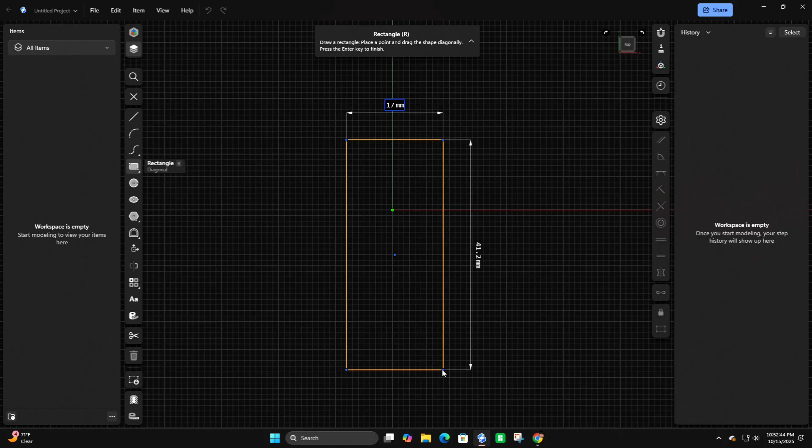All right, so here we go. Let's work through a little design.

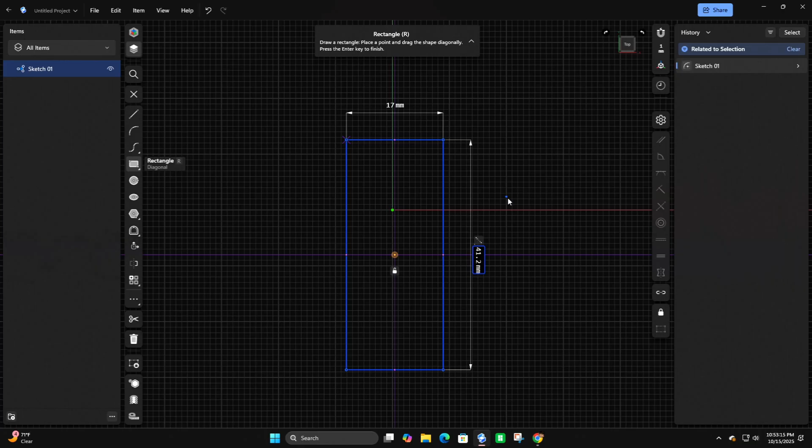We're going to come up here to plus. Now I like to use this top version here, so the cube up in the upper right-hand corner. Let me get rid of this. Up here in the upper right-hand corner you'll see the cube that moves things around. You can hold right click on the mouse and do the same thing. But if I left click right up here where it says top, see front, top, and hit top, that's going to give me a bird's eye view, top looking down. Now I just clicked on the scroll wheel and I was able to grab and move the screen.

Now let's start with a quick bookmark, and we're going to use some simple shapes. Come over here to sketch, and I'm going to left click on sketch to get that open up. And we're going to start with a rectangle.

I'm looking down at my caliper, my ruler, and I work in millimeters, it's just really easier. So I'm working in millimeters and I want the overall length of my bookmark. Let's make it 120, which is just about a little more than 4.5 inches, almost 4 3/4 of an inch. But we're just going to do that at 120.

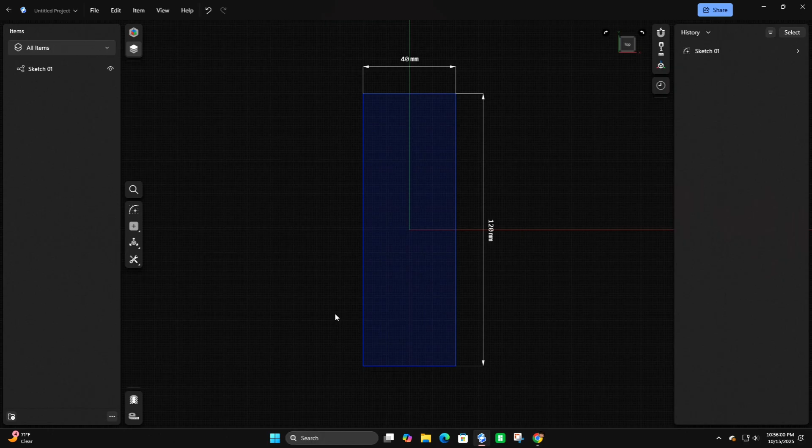And why that's good is because these squares actually represent an amount. Let's change this so it looks better. Let's do this at 30. Escape, click in the square, 30. All right.

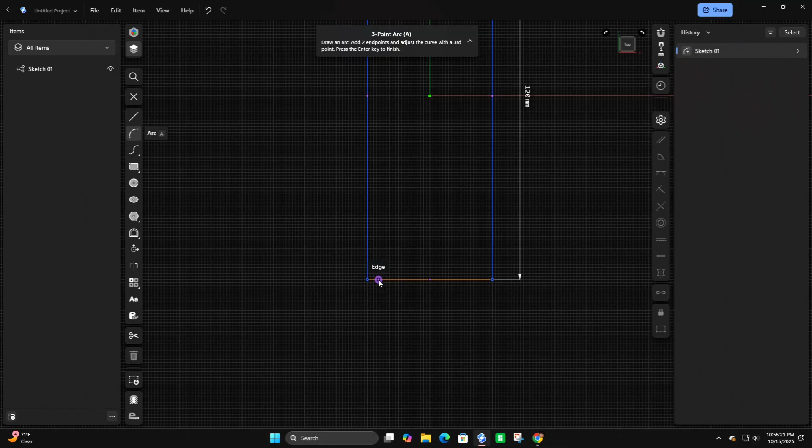Now if we come over here, you see this is 1 millimeter square. Now I want you to watch up here. As I scrolled out, it changed to 5 millimeters per square. 5, 10, 15, 20, 25, 30. All right, now if I scroll back down to 1, you count all those and there's 30.

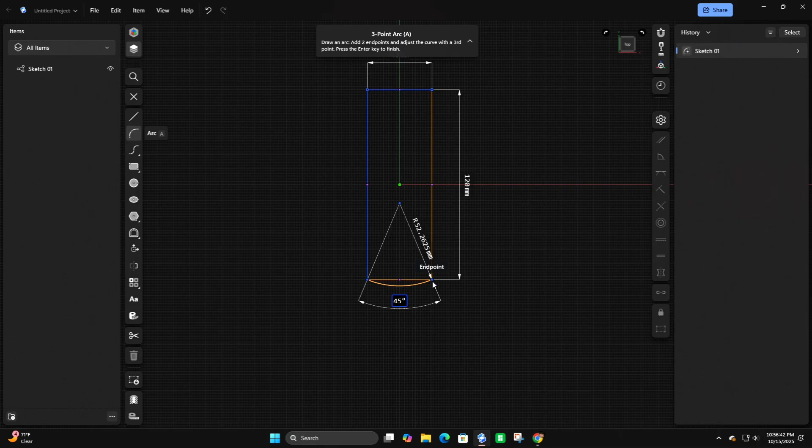You can come in here and lock the grid. Now when you scroll in and out, these won't change. There's always going to be 30 squares. So if that helps you when you're building something, you can lock that in at 1 millimeter to count, or lock them in at 5, whatever works best for you.

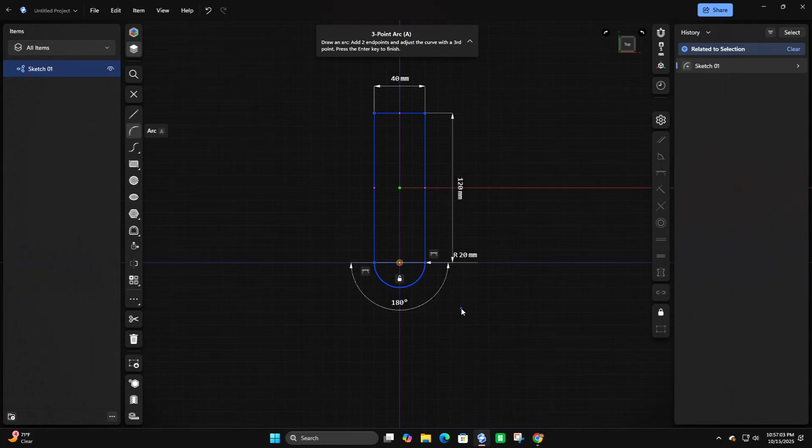So I'm going to click again in 30. I'm going to go 120 and hit enter. Again, you can hit enter, you can do the check mark, either way. Top, click on the scroll, that makes it drag and move.

And then I think I want it 40 on my width. Okay, so we got 40 on my width. All right.

So we've got at least a basic bookmark, right? If you just print this bookmark, you can stick it in the book, but we want to do something a little bit different than that.

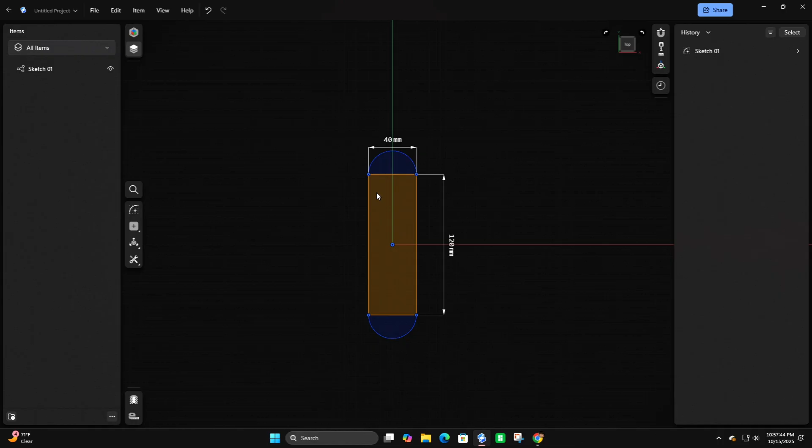So what we're going to do, let's put rounded edges on each side. So you come over here and I want you to click sketch, and we want to use this arc.

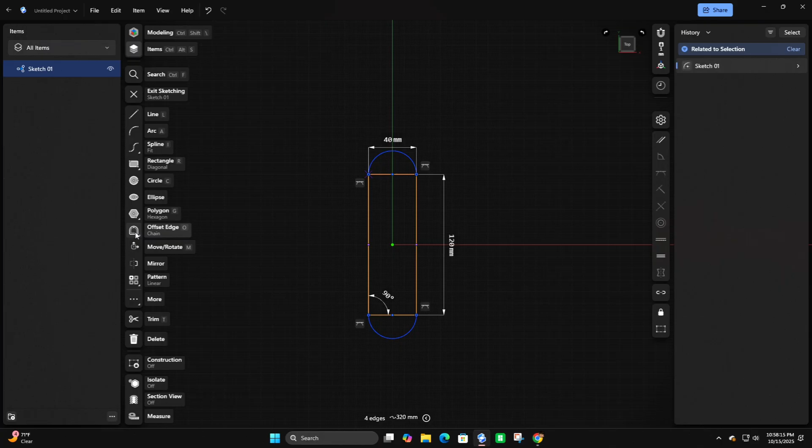All right, so when you are in the middle, it says edge. See, if you're just on a line, it says edge. If you're in the midpoint, it'll say midpoint and endpoint. So that helps you know that you're actually on the spot, even if it's hard to see. So click the endpoint, and now we're going to come around and click endpoint again.

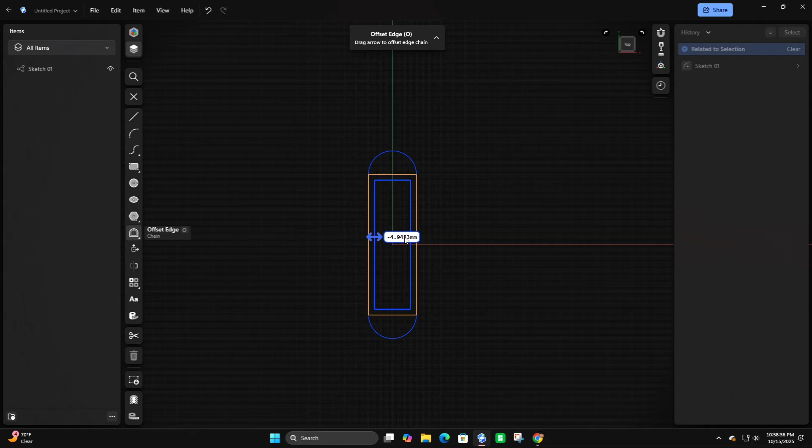Now you can let off and just use the mouse to scroll and see how we can put whatever kind of angle we want on. I want you to put 180. So just move that till it snaps in place, left click, and now you have your 180.

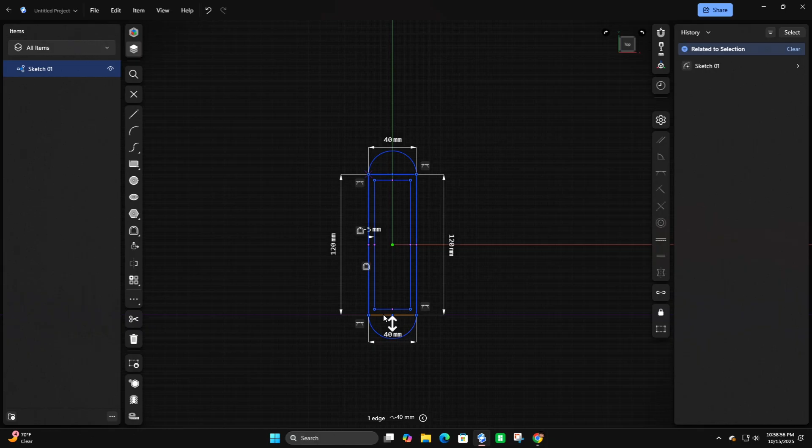Now we're going to put another one up here. Come over here and grab this, 180, and click. All right. Now hit escape and escape and escape. We just want to kind of get out so we can see the piece that we have.

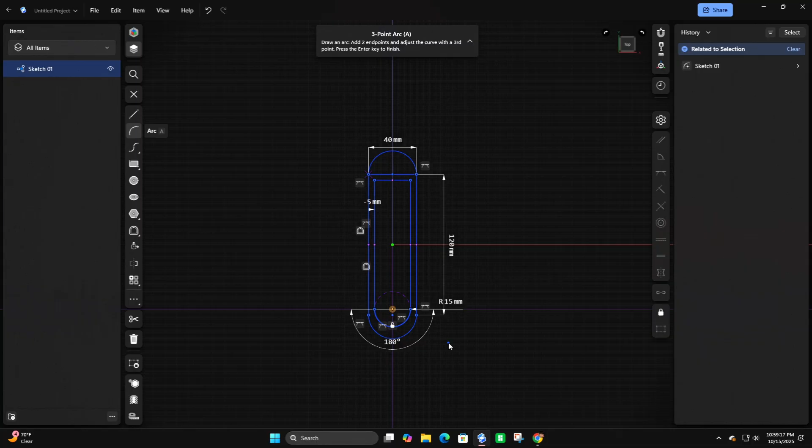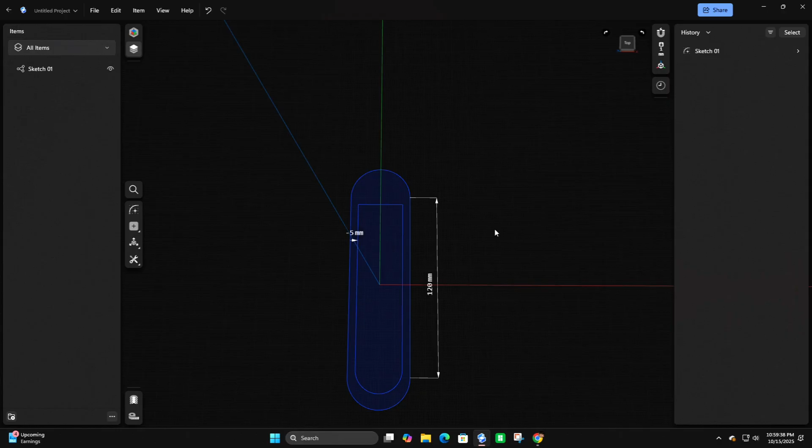Now what I want to do is make this kind of look like a paper clip. So what we're going to do is see if we can grab, we're going to hold shift and click, click, click, and click. We got them all clicked.

Now we're going to come over to the work plane. We're going to look for this offset edge right here, and we're going to click that.

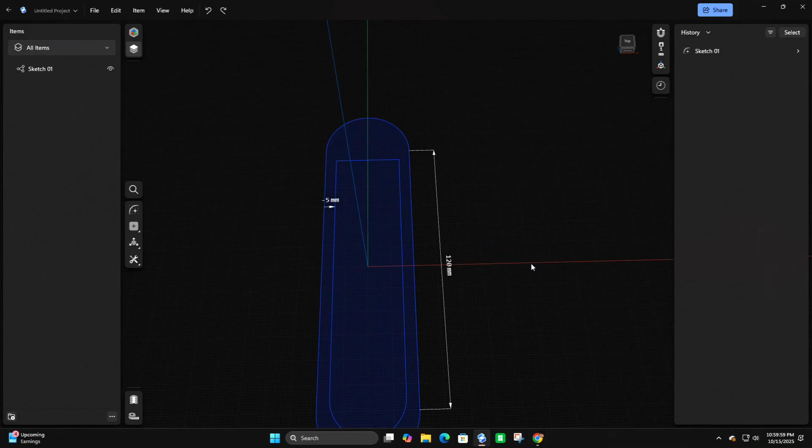And we're going to click on this line, see how it's all lit up. We're going to move this just a little bit, because it can go out or in, so we're going to go in. But we're going to jump over here and click 5 and select. Okay, escape. Now let's look at what we need to do.

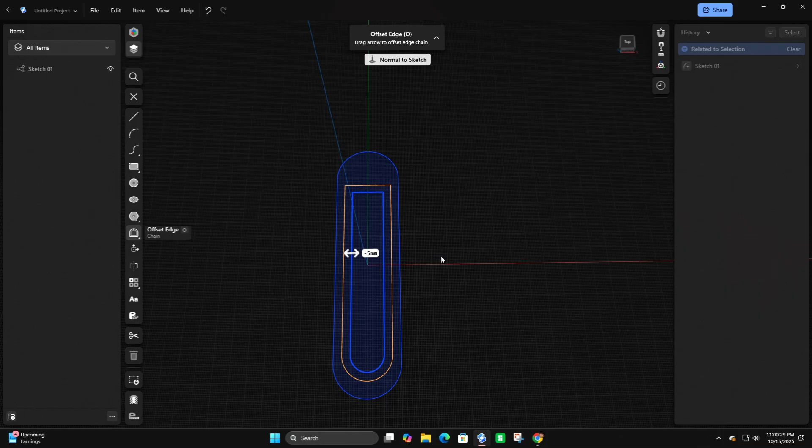It looks like we want to get rid of this line here. So I'm just going to hold on that line once and hit delete. I'm going to click on it again and hit delete. All right, so now we've removed that original piece.

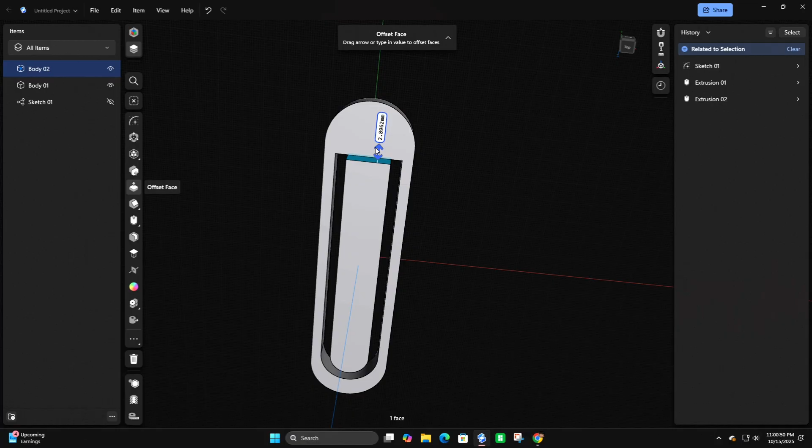So now we're going to come over here and click arc, endpoint to endpoint, and then we're going to grab that 180, left click. Now we got that 180. Let's back up and see what we got to see.

All right, so we need to go in here and pick this line here and hit delete. Now that line's gone.

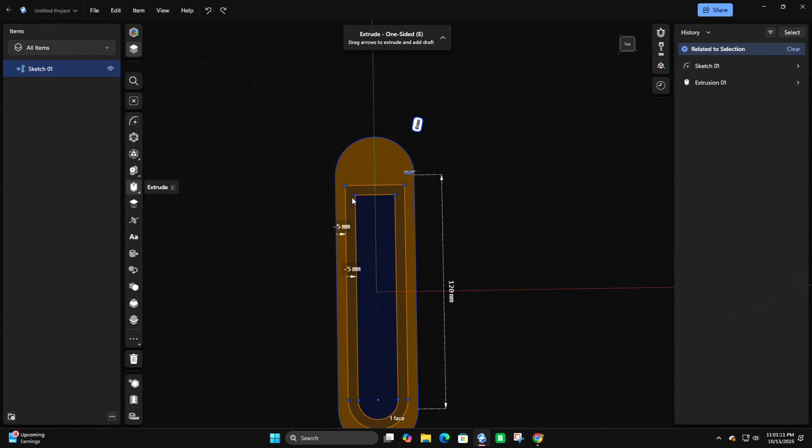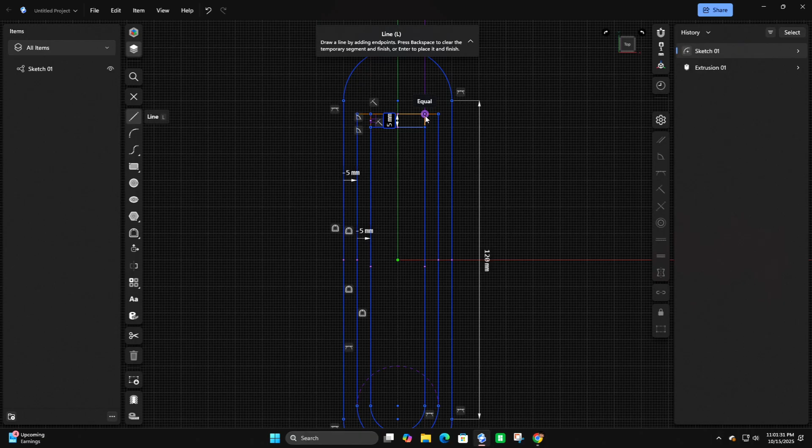Okay, so now we need to think about this—we need to duplicate this one more time so it's a real paper clip, and let me show you why. Because when you click on this, it's going to raise up. See, we're missing some stuff. So anytime you mess up, just come up here and undo.

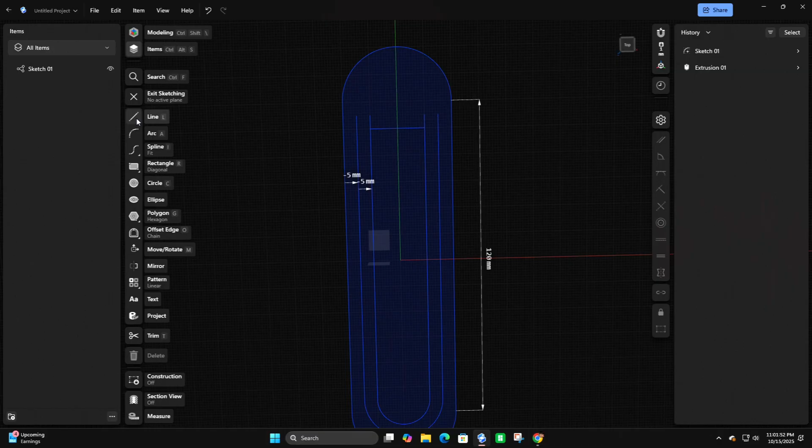Let's try to take this line and shift and add this line, and this line, and that line. Now let's do an offset edge, and we're going to go in. I don't know if we should go all the way in 5. Let's do that, see what that looks like. 5, check.

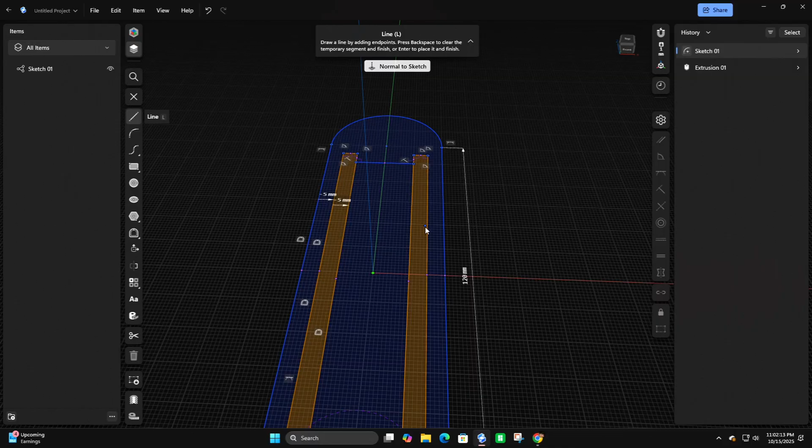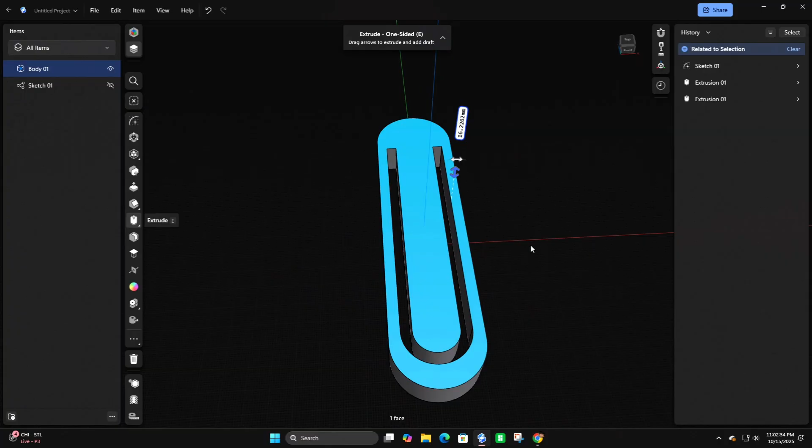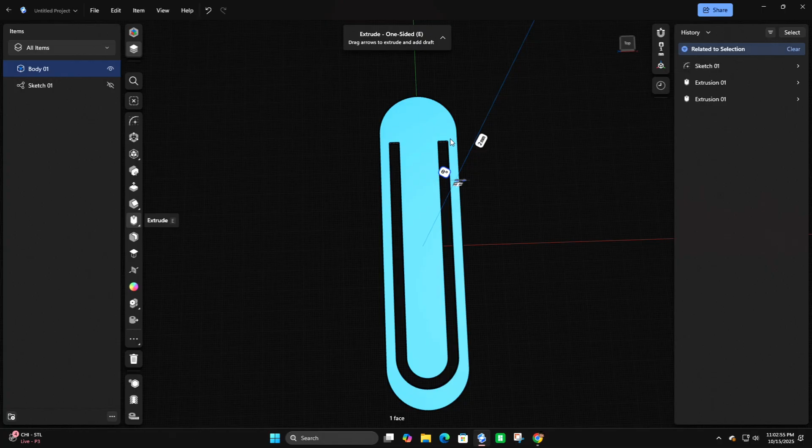But let's do that a little bit different. Let's take this line here. We're going to come over here on the sketch tool. We're going to click on line. And if we grab this and go till it says intersection, hit escape, click once, move up till it's on

the intersection, escape. Now we need to get rid of this line here.

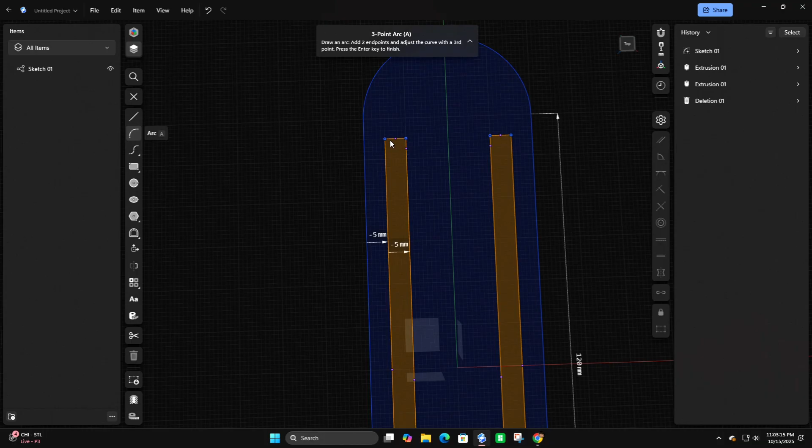But when we do, we're probably going to miss something here. So let's see what happens. We get here, and then we get delete. Now we're missing a way to close that off.

So we need to come back in here with the line tool, sketch, line, endpoint to endpoint, escape, endpoint to endpoint. All right.

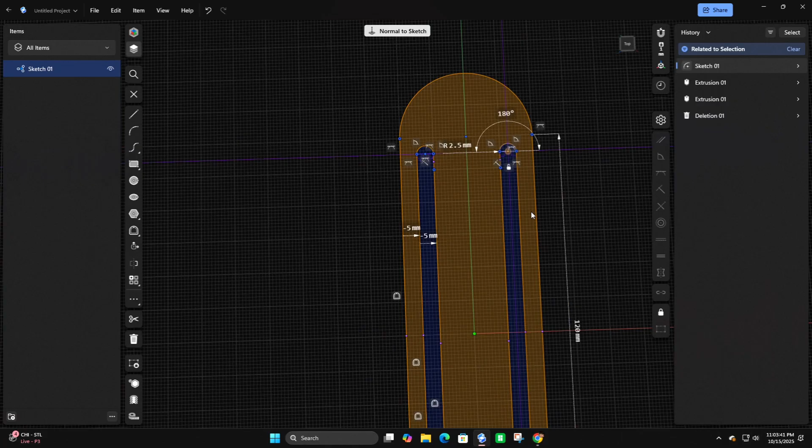Now let's see what we got. So we want to eliminate this section in here. I think we still need to get rid of one more piece. So let's click on that one, hit delete.

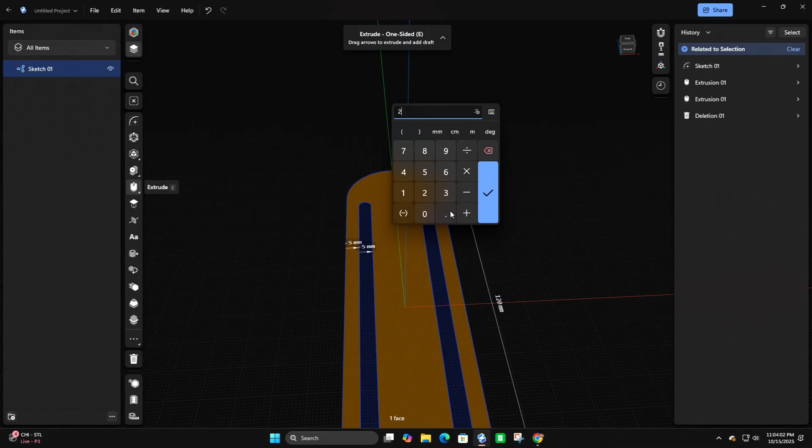And now when we touch our bookmark, we only want to come up 2 millimeters. I came up really, really high, but you're not going to get that between a piece of paper. So click in the square 2 and hit check. There we go, we have a bookmark.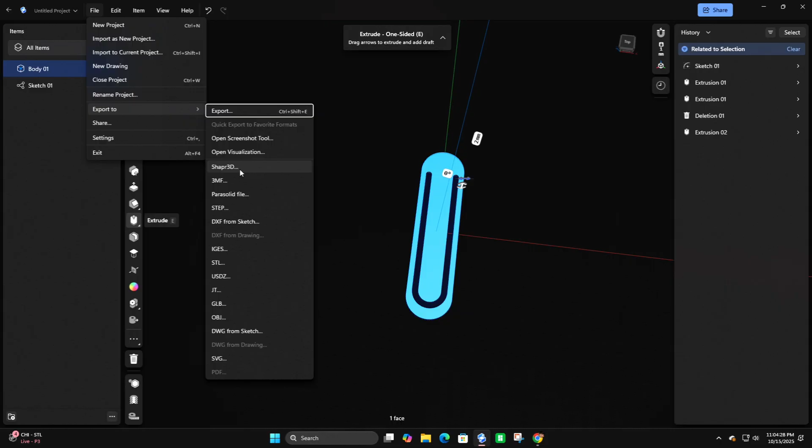That should be the simplest way. But you know what? I don't know, does it look wrong? I think it looks wrong. I think we need to keep this circle flow.

Yeah? So if you click on the body and you see the body's over here, you can hide the body, bring the sketch back, bring the body back. Let's just right click and delete the body.

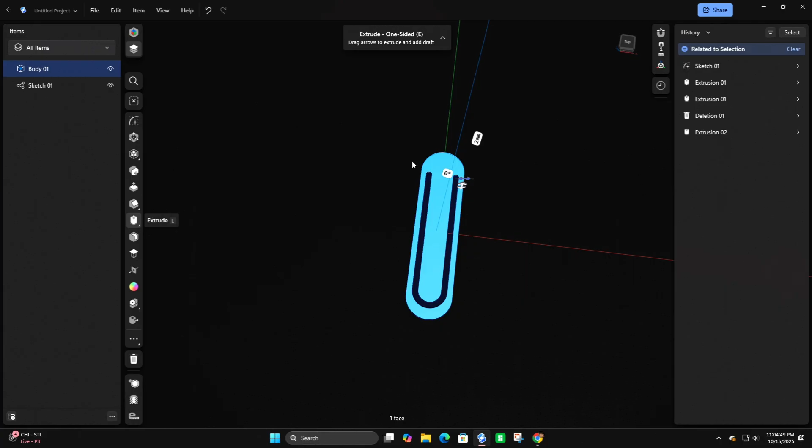Now I want to come in here with the sketch tool and the arc tool, and let's do endpoint to endpoint. Grab our 180, escape, endpoint